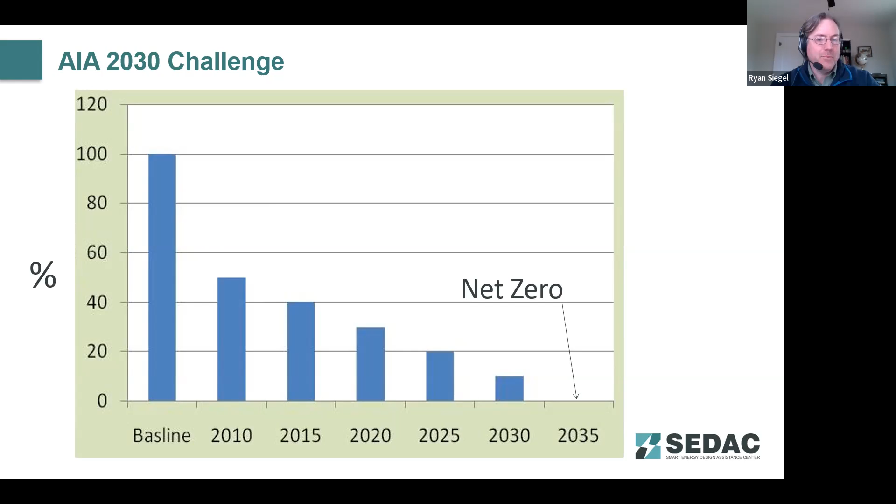But to reach those targets of the 2030 challenge, here we're showing the site EUI targets to reach those reductions - the 70% reduction and the 80% target reductions. You can see these are quite substantial targets to hit. They're quite low energy usage for a lot of facilities.

One of the things to note is like looking at convenience stores, gas station facilities, having that target energy consumption of 72.4, and then at that 80% target dropping down to 48.3. So it's quite difficult to hit for a facility that's got a lot of lighting, refrigeration equipment in that building, cold food storage. So it's a difficult target to hit, but with improvements to technology and efficiency of systems, lighting systems, we're getting much more able to hit these targets. But it is a significant lift for design and facilities to hit these lower targets.

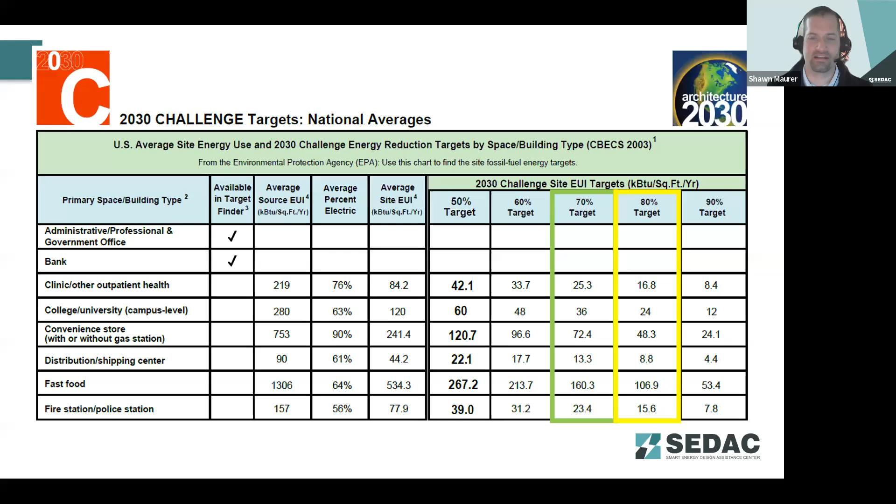So how does the zero code help? Well, the zero code and the IECC Appendix CC or RC, depending on commercial or residential buildings, for the zero code just requires that the building comply with the minimum requirements of an energy code or standard. They do have language written into them that you can use an advanced code, such as the 2021 International Green Construction Code or ASHRAE 189.1. But the baseline requirement for the zero code is that you meet the baseline energy code in effect for your area. So for us coming soon, that's going to be the 2019 ASHRAE 90.1 or the 2021 IECC.

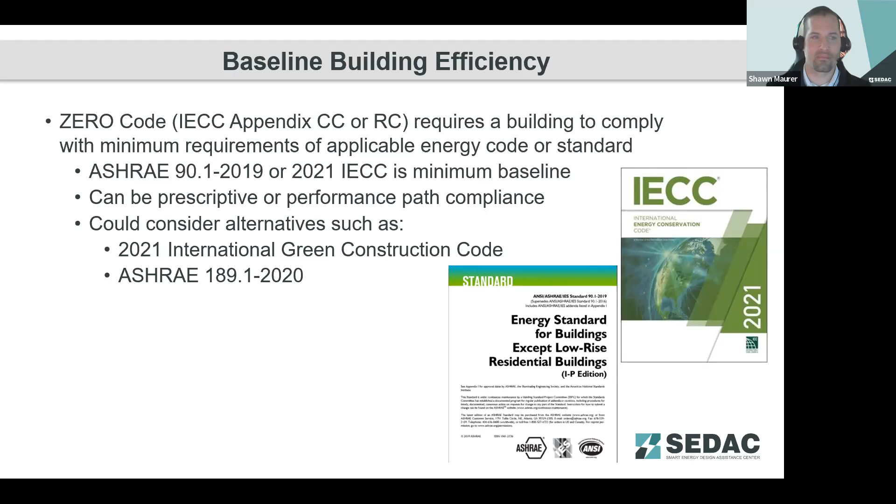They do have the ability built into that zero code to do modifications to advance energy efficiency and apply renewables to buildings. So they have language in that zero code to require site electrification and removal of on-site combustion, as that will negate the carbon offsets required for on-site combustion through purchase of renewable credits and offsets. It can also be modified to use more advanced energy standards through language built into the code that says if you're going to use a more efficient standard, insert those standards in this portion of the code.

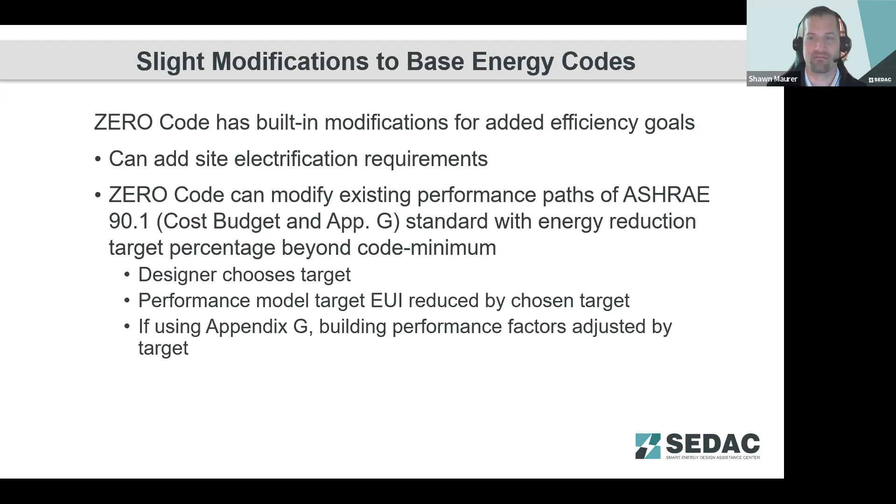If you want to enforce a lower target for your building, the code has language built in where you choose your target and calculate what the energy efficiency is going to be. If you're doing performance modeling, they'll have target EUIs reduced by that designer's chosen target. If you're using Appendix G, there are performance factors adjusted by that design target as well. So it's structured so that even though the minimum requirement is to follow the minimum building energy code, you can input advanced codes into the zero code standard.

As far as renewable energy requirements, it simply requires that on-site and off-site procured energy must exceed the minimum load used at the site. The way that's figured in the energy code, if you're following a performance path like Appendix G or one of the energy cost budget methods, you simply use your calculated budget building's energy usage and offset that with on-site and off-site procured energy. If you're following a prescriptive path, they have calculated a table of energy use intensities for different facilities.

We've put a sample here of that table for climate zones 4 and 5 in Illinois, so you get an idea of the types of targets they're looking at for those EUIs. You would get similar EUIs if you modeled the standard reference design building required for the performance path. That should get you close to what these targets are.

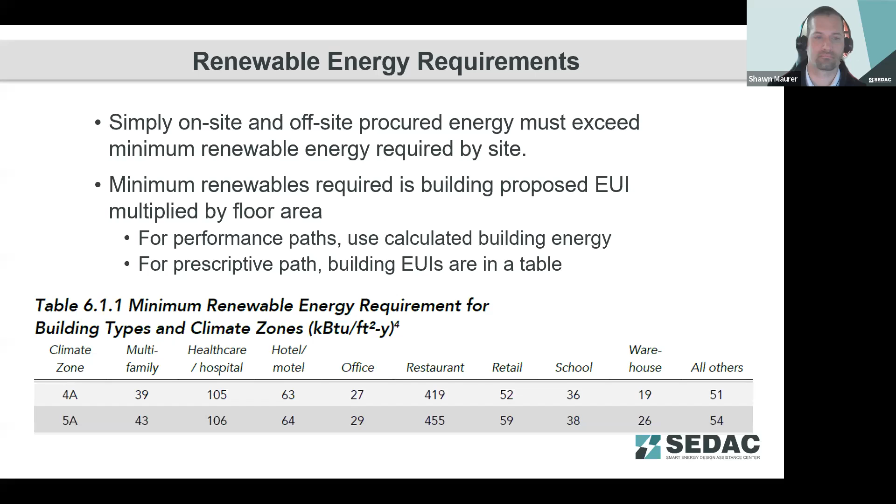So that's how it figures out what your load requirements are to determine how much renewable energy you need for your site facility. For on-site renewables, the zero code is pretty straightforward - the energy produced directly offsets energy needed at the building. For off-site renewables, there is an adjustment using a procurement factor. That procurement factor varies based on the type of procurement you're using for your offsite renewable energy. It accounts for grid losses and the potential that your procured energy results in the addition of new renewable energy deployment.

So the expansion of solar, wind, hydroelectric, and various other renewable sources. And it accounts for the potential of building owners - as buildings change ownership over time, there is the potential for them to opt out of renewable certificate agreements, and you then lose the benefits of that renewable credit for that facility.

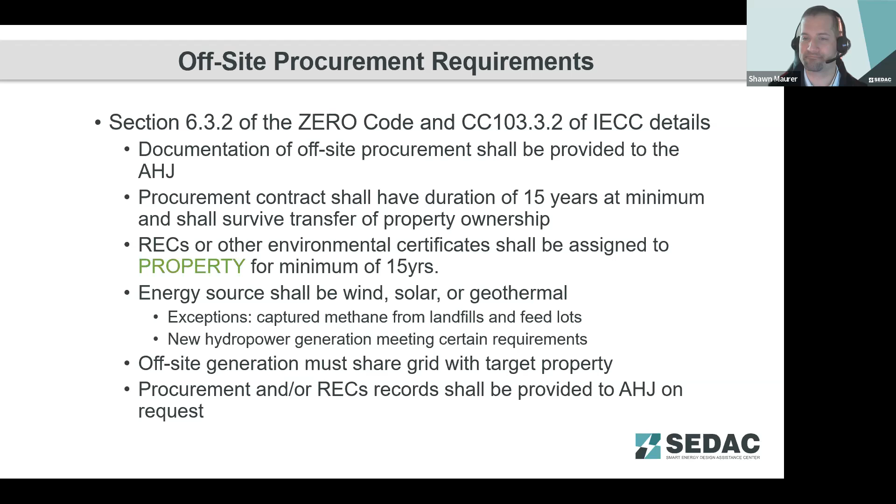So before we move on, we do have a quick poll question here. Our first question: the zero code requires buildings be how much better than the minimum energy code before applying renewables? 10%, 15%, 20%, or do they just have to meet the code minimum performance? And then: the zero code and the IECC appendix use the same procurement modifiers. Is that true or false?

Give that a couple more seconds. Seems like we got a few more responses coming in. Okay.

Looks like on our first question, everyone picked up that the zero code requires at a minimum that you just meet code minimum performance requirements. They do not require you to have advanced energy efficiency in your buildings, just to meet that code minimum requirement. And then the zero code, which is ASHRAE based, and the IECC Appendix CC, do have different offsite procurement modifiers. ASHRAE is a little less stringent than the IECC. The IECC modifiers are much more stringent. So they are different, and it will be important for following zero code in the future.

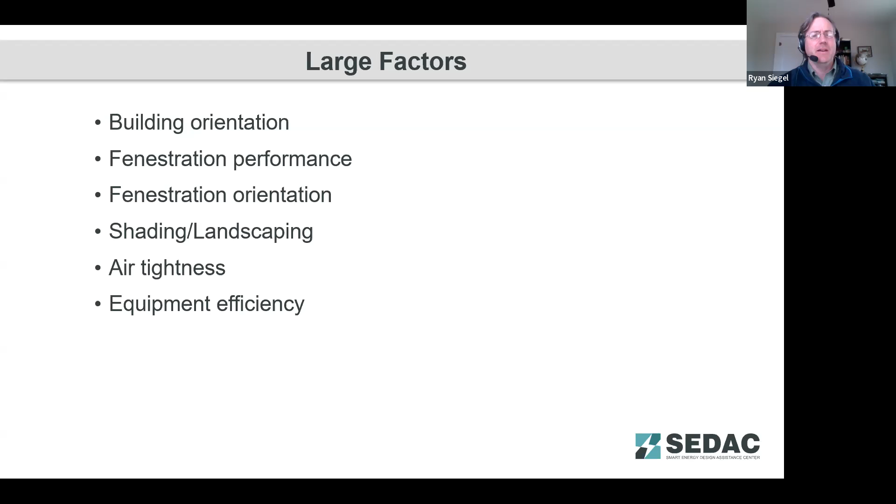Understanding that the envelope defines the boundary between inside and outside, if we don't have a good boundary there, you end up with a lot of energy leakage between the inside and outside, which makes it much more hard and difficult to reach net zero.

So looking at building orientation, best practice out there is to try to limit east-west exposures for buildings, particularly because these are the facades that get heavily loaded with sunlight and sunshine exposure, particularly in the morning and the afternoon. So in the morning, the east side is going to be heavily loaded with solar gain, and then in the evening, the west side is very loaded with solar gain.

Fortunately, this building is totally open inside, for equipment and offices, such that you don't end up with a dramatic imbalance in that gain. The gain coming in from the east for this facility is able to make it all the way through the building, so you don't end up with the east side being hot in the morning and the west side being hot in the afternoons.

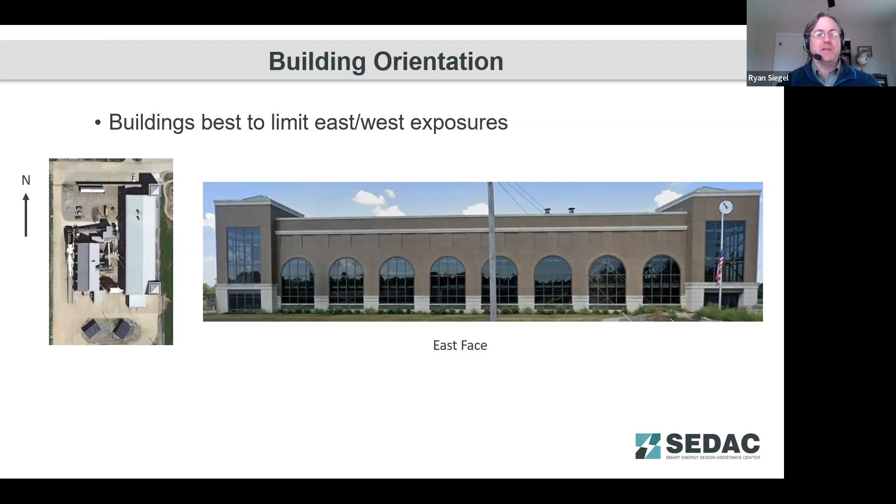Once we've tried to orient our building well and place fenestration in a good orientation, the next step is looking at actual fenestration performance, understanding that even the best windows out there really make for poor walls from an insulation perspective.

Here, understanding that the code calls for fenestration with a U factor no higher than 0.36, which is just a little under an R3 equivalency. Even the best in class that we're finding on the market is substantially better, at about a 7.7 R value. However, even a code wall minimum for opaque walls is 15.6 R value.

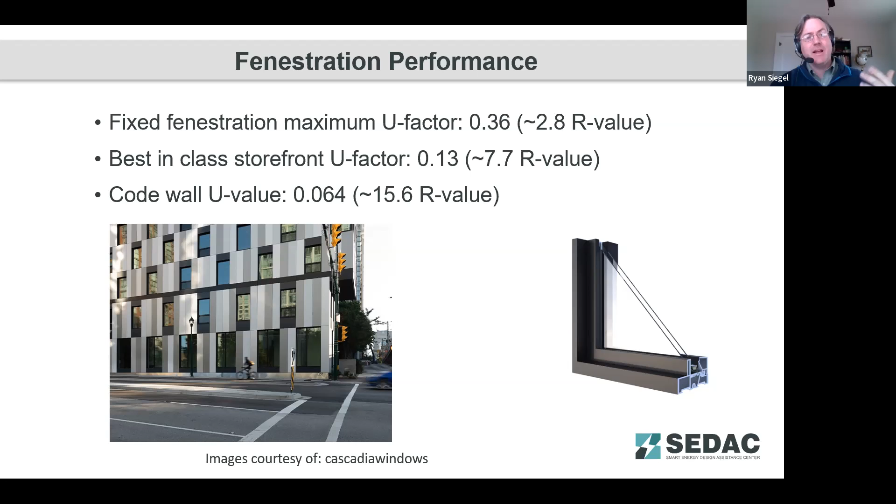So best in class is 3 times as good as the minimum standard, but it's still only half of what the wall is really needing. So from that aspect, it's trying to make sure that we're judicious about where we place fenestration, and trying to make sure that we're moving toward this best in class. Again, when you say you're losing two-thirds less heat out of the best in class windows, that's going to have a dramatic impact on energy consumption.

As part of this is fenestration orientation. As noted earlier, trying to perhaps minimize or not include a lot of east and west facing glazing, but perhaps use more of the north and south faces. North gives a nice even light during the day, but then you end up losing a lot of heat during the winter. Southern glazing, you can get much more heat load from that, but you can use that to your advantage throughout the year.

Something I should mention is one of the proposed amendments working its way through the state of Illinois is for buildings that have larger east and west facing glazing relative to the north and south facing glazing. They're actually going to require better solar control and performance of that fenestration. So if your building is heavily east and west glazed, you're going to need even better windows than what the code calls for. Solar heat gain can really be a benefit to you when you want it, but it can really be a detriment if you allow it into the building when it's not desirable. Bringing in that streaming sun in the summer is really going to put a heavy load on your mechanical systems.

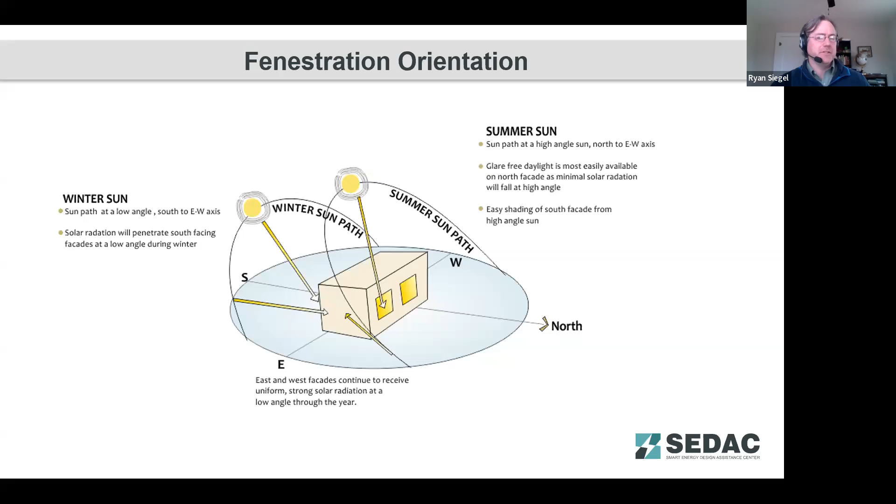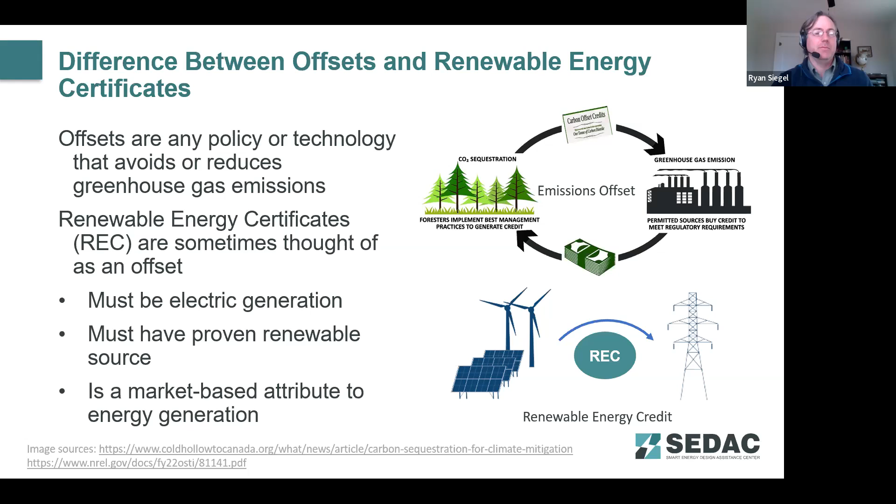As far as looking at offsets, we can do sequestration—trees or growing plants, CO2 injection. This has been carbon capture and sequestration from power plants, and there's been a lot of news around that. As far as the practicality, that has been a bit more difficult to do.

Could also have thermal renewables—biomass and biofuels gathered from a sustainable, renewable source. And then looking at transportation offsets, transitioning from gasoline to electric vehicles can produce carbon emissions reductions which some people may choose to monetize. And also, what are we building buildings out of? If I choose to change from concrete to timber frame buildings, there is a reduction in carbon emissions from that. Carbon offsets tend to be a little bit less tangible and a little bit squishier.

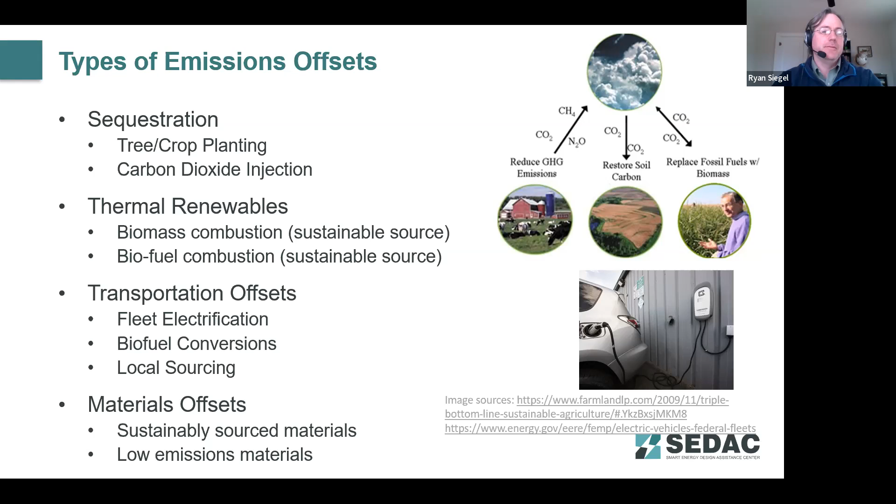Whereas if we're looking over at understanding that some of these offsets are renewable, some are not. Biofuels, you can do a reduced carbon, but once you use them, you've kind of used them.

And so some of these offsets are just, I'm going to choose to do something, like thinking about am I going to choose to not drill the oil or extract the oil from my property. That's really only a one-time thing. Once you've paid me to not extract it, I can't sell someone else to not extract the same thing that you bought.

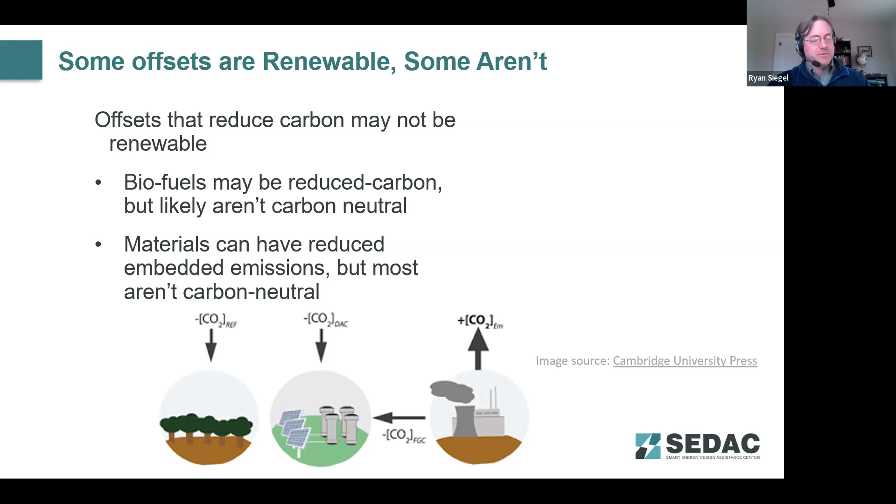So there's definitely some difference here. With that, I just want to make sure that we've covered differences between renewable energy credits and offsets. So what is the difference between a REC and an offset? Are they essentially the same? Offsets are policies or technologies that avoid greenhouse gases, and RECs are market-based for energy or electricity. Offsets are a type of REC. RECs aren't always renewable. Offsets are always renewable.

And the major takeaway from the message here, as we're getting some responses in, is that the zero code is dealing primarily with renewable energy credits. Offsets would be a separate component of net zero goals outside of the zero codes.

Looks like most people have answered here. All right, okay, good. Most people picked up that yes, offsets are policies and technologies, and RECs are market-based attributes for renewable electricity. A couple of answers there say usually RECs are considered a subset of offsets, not the other way around. So that's kind of a reverse statement there.

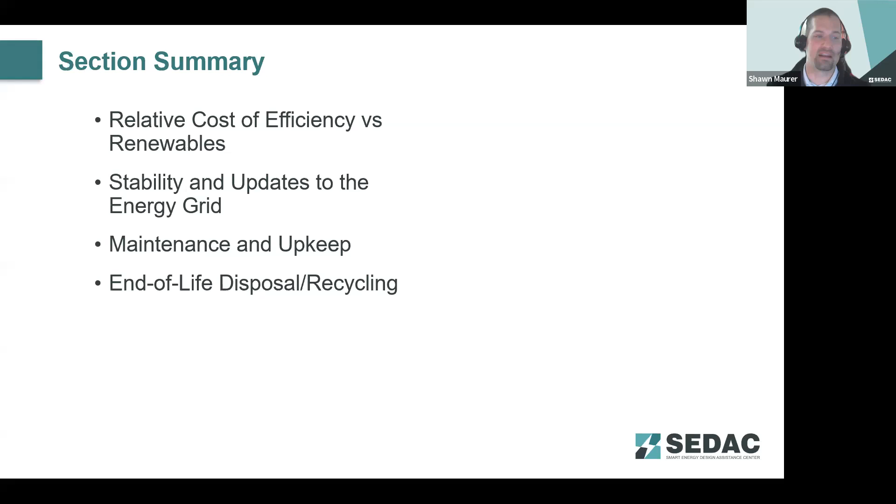Part of it is the relative cost between installing new renewables and making buildings efficient. And then we'll touch on some grid impacts, maintenance and upkeep, and end of life costs for building efficiency versus renewables. Just on a cost basis, here we're looking at the basis for utilities.

Funding energy efficiency projects in general is going to be more economical than renewables. There are some more energy intensive energy efficiency projects like whole envelope upgrades that usually have longer payback periods or higher associated costs. But in general, improving energy efficiency for buildings is going to be a lower cost option than installing utility scale or even local scale renewable energy.

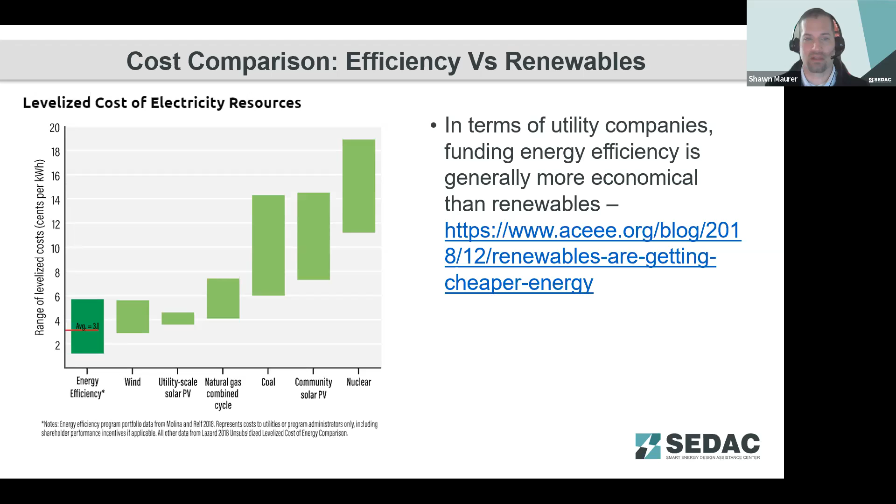So looking at kind of the relative cost for building owners, renewables are going to require additional equipment added to the building. It's going to add to maintenance costs and labor. And if you're using offsite, now you've got a reduced utility cost, but you do still have a utility cost associated with that energy consumption.

Whereas energy efficiency can be implemented as a normal part of a building's maintenance budget. So if you design efficiency into your building, it doesn't necessarily have to increase the maintenance load on the building owners to upkeep that efficiency.

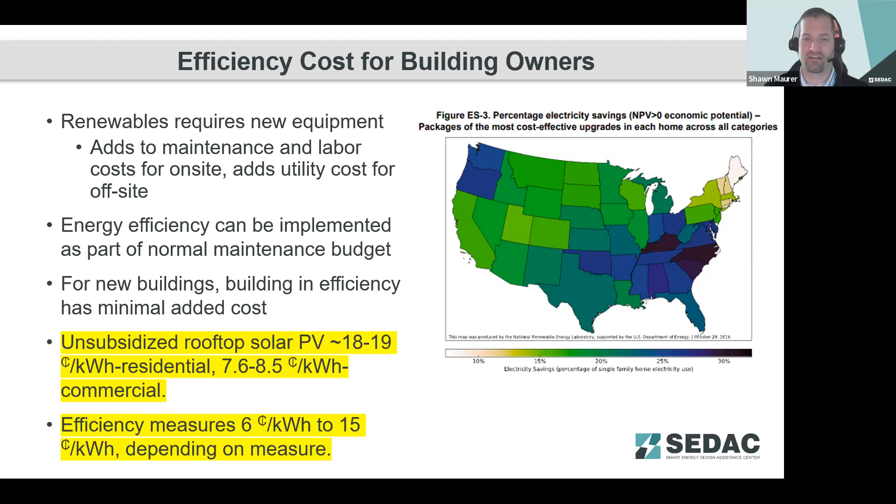But there are a lot of non-energy benefits to improving building efficiency as well. You've got indoor environmental satisfaction from the occupants, improved health overall as you're controlling the risk of mold and mildew, you're controlling the air quality better. You increase the productivity of the occupants with good designs. The longevity of the building and its systems is improved through better efficiency, and long-term and short-term maintenance costs are also reduced.

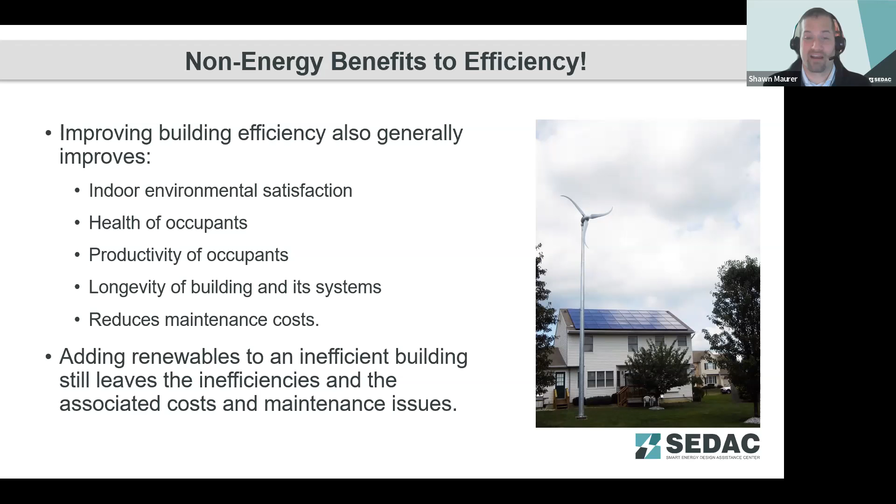Whereas if you built kind of a standard building that has some of the typical inefficiencies associated with it, and then you add renewables to it, the building still has those intrinsic inefficiencies. You still got occupant discomfort next to drafty windows and things like that, that over time are going to increase the maintenance and operating costs of that facility and kind of offset a little bit of the benefit that you get from installing those renewables.

Just looking at some of the added maintenance and upkeep for solar panels, you've got to clean them a few times a year to get the pollen and dust off if the rain hasn't fallen in a while. There is the potential for storm damage from wind and hail, although with improved panels now that's greatly reduced, it is still a possibility. But the big component is the inverters that convert the DC power to AC power so that you can grid tie these systems, and usually that's where most of your failures are going to be, on that electrical side.

So there is a maintenance and upkeep cost. The more renewables you have to install, these inverters and other components, to connect those loads together, the more you have, the more potential failures you have, the higher the maintenance upkeep you have as well.

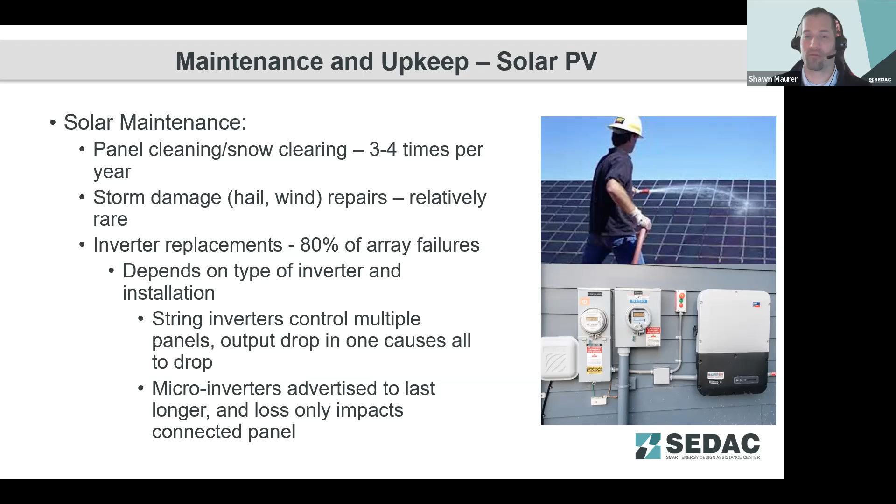And similarly for wind sites, if you have a wind turbine at your building, you've got this large device that you have to do maintenance on. A lot of times we've seen these wind turbines just run for a few years and then a mechanical problem happens, because they aren't getting the regular maintenance they'd get as part of a utility scale implementation. They have to be maintained two to three times per year. You've got to have either cranes out there to lift heavier equipment if they're doing a drivetrain replacement, or you've got to have specialized crews trained for high altitude maintenance work on these devices.

So there is an associated cost for maintenance and upkeep, and if we can reduce our loads up front and reduce how much additional renewables we have to install, we also reduce these maintenance costs.

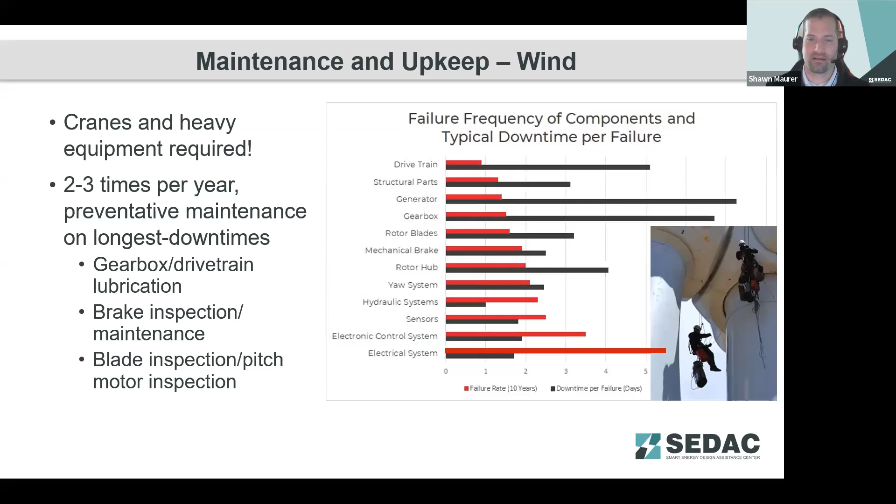For buildings themselves, better efficiency doesn't necessarily mean you're going to increase the maintenance load for the building. A lot of times, higher efficiency is going to reduce your maintenance loads. A great example is if you improve the envelope, you're reducing air leakage through that envelope. You reduce the risk of both water leaks and condensation damage, which can extend the life of the structure almost indefinitely.

For HVAC and lighting systems, if those are properly sized and installed with proper controls, there's less risk of short cycling, which reduces the efficiency and lifespan of that equipment.

The one trade-off here is that as we've made buildings more efficient, we've started installing more controls. The additional sensor maintenance load does increase slightly. You've got multiple points in the building now with airflow sensors and temperature sensors, and those things need to be calibrated or replaced over time. If you're using wireless sensing technology, you've got batteries to maintain.

So that's kind of the one trade-off with improved efficiency. If you're doing advanced controls in buildings, you may have slightly higher maintenance loads than a typical building for those control devices. But if you're doing a good design and trying to simplify that control system as much as possible, you can mitigate that, or even reduce the maintenance load for facilities.

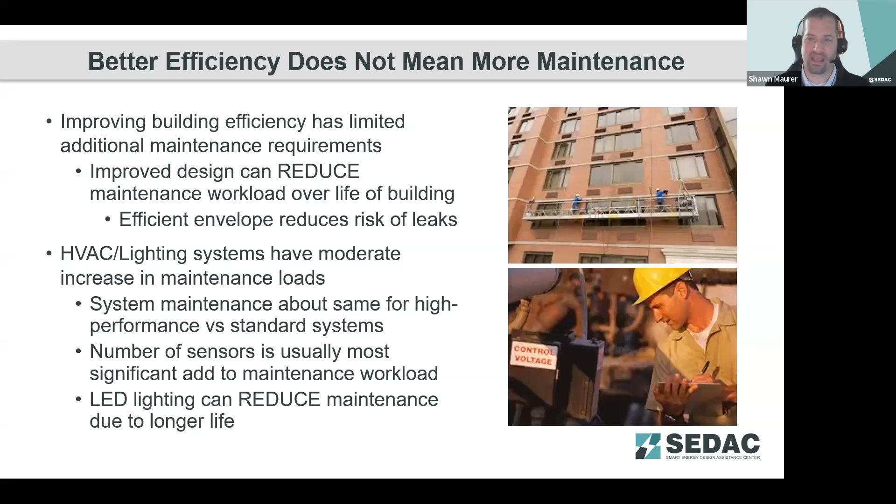So unlike renewables, which add more equipment to a building that needs to be maintained over time, built-in efficiency is not going to add that additional maintenance requirement. You're not adding more things. An efficient building and an inefficient building are generally going to have the same building components to maintain, so the workload overall shouldn't change that much.

We do acknowledge there's one exception, as buildings take more and more advantage of different efficiency strategies, and that is dynamic envelopes. You've got more moving surfaces, little actuators for shading devices, and that's going to dramatically increase the maintenance load for an envelope. You've got a lot more failure points, things that can go wrong there.

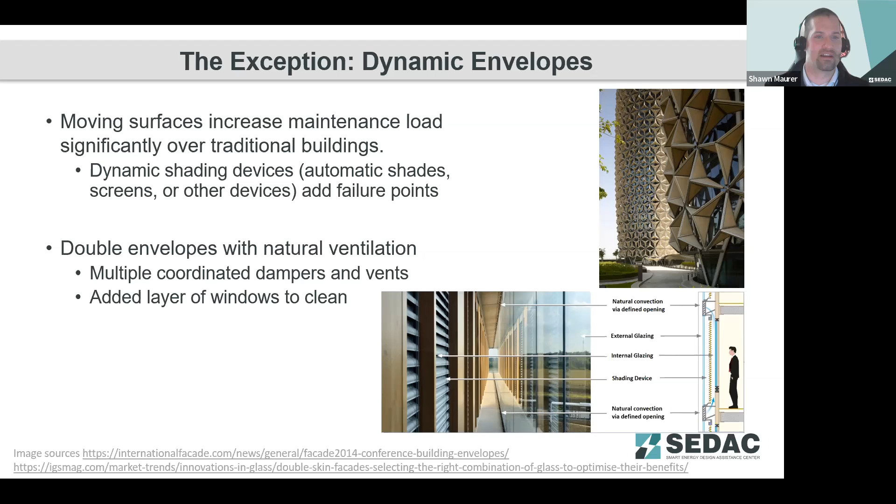With double skin envelopes, it depends how they're deployed. If you've got some automation involved to take advantage of natural ventilation, then you've got dampers and vents with control devices on them that's going to increase the workload a little bit. Otherwise, the main difference is you've got an additional layer of glazing to clean. So depending on how these are deployed, it can be either a minor addition to your maintenance workload or a more significant one.

Usually the core components of the building, the structural components, can last for a decade or more—a century or more, many decades though, at least twice the life expectancy of most renewables.

There are components like roof surface structures, membranes, things like that, that have a 20 to 30-year life. But it's a relatively low cost to replace just that one component over the entire roof.

Similarly for fenestration, typically after 20, 30 years, you start having seal failures, things like that, that's going to degrade the performance of those windows. And it might start to be cost effective to look at replacing those fenestration systems after that time frame. But again, approximately equal life, and if you've got good, well-installed windows, even slightly longer life than most renewable technologies.

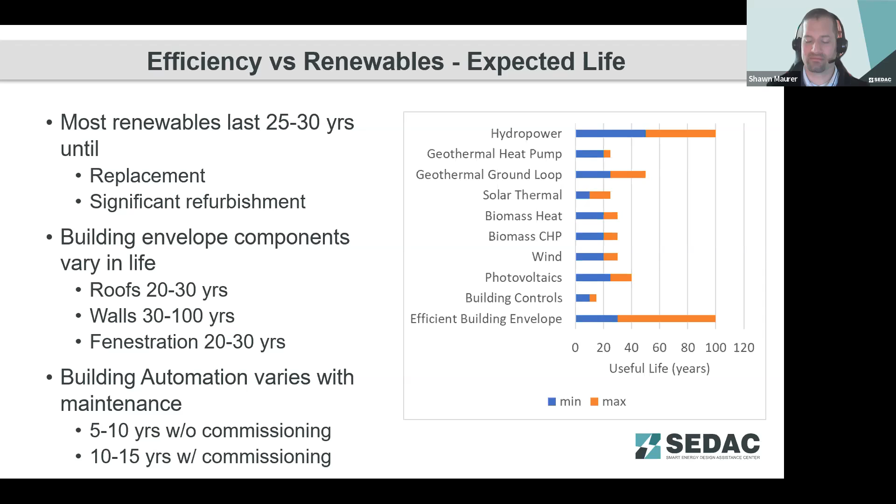But we do want to note it's going to take a combination of strategies to reach a net zero future. Solar energy is generating that mid-afternoon peak energy. With some storage, you can offset that to match some of the building loads a little bit. Efficiency is going to drop your building loads overall, so that renewables—one, you can reduce the capacity that needs to be installed, and two, you open up a little bit more load flexibility as well.

With building controls, you can shift building loads around a little bit to better match renewable production and align generation capacity with demand. So a combination of all these needs to be done, but again, efficiency is doing that overall reduction of total energy that's going to last significantly longer as well.

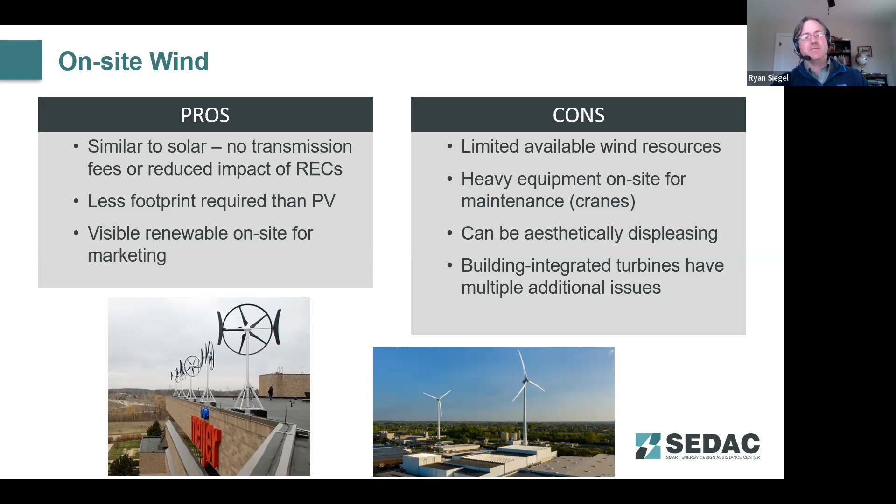On-site wind, again, we don't have transmission fees and anything like that. These can have a smaller footprint than PVs, and again, highly visible. The issue you run into is available wind resources are fairly low for this. And these can require some heavy equipment to do maintenance—a lot of cranes, as you know, if you need to lift parts of these off, can be rather heavy. So again, aesthetics is a judgment call depending on different people's viewpoint, and trying to integrate the turbines into buildings can have a lot of challenges there.

So typically we see renewables procured offsite. The nice thing is, if you procure offsite renewables, typically there's a third party dealing with any of the maintenance, as you're normally buying those through a power purchase agreement or other utility contract. Again, you don't have quite as much impact on the direct facility, but the downside is, since it's offsite, you've got to pay to get that power in, and you cannot be grid independent.

That's not even an option, and you don't have the visibility of making that statement, of being able to show people that renewables are important to you. It's not quite the same when people ask and you say, hey, I got renewable energy, and they ask you where it is, and you say, well, you go about 300 miles west and hang a right and you'll see it.

Utility grade, utility scale renewables do have wilderness and wildlife impacts. Fortunately for solar, we've seen this transitioning away from the gravel pad that everything sits on, toward more of a planted bed, with a lot more pollinator and nature-friendly, native-friendly species. So we have seen that transition here.

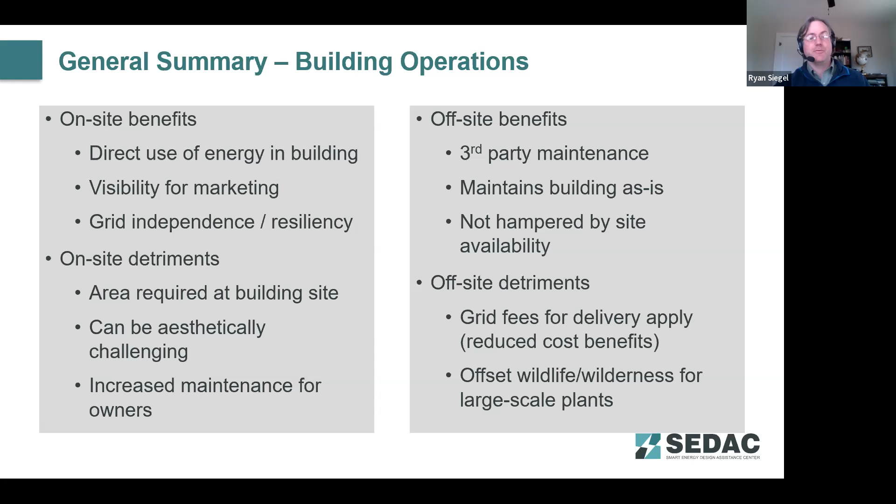Some of your procurement options, if you're doing on-site procurement—most of the time we see this done through net metering. You can do some export, though generally the terms aren't very favorable if you do end up having to export electricity. With that, because it's directly metered, you have it directly offset immediately, so you're not having to trade back and forth and do a lot of mental accounting, if you will. And the nice thing about on-site is they're generally a permanent part of the building and site.

Whereas if we look at more off-site, you can just purchase electricity from off-site, which is perfectly fine. And the issue can be trying to actually get a hold of the RECs. This can also be an issue when you're dealing with on-site renewables.

I mentioned I'd bring up the state of Illinois incentive programs for renewable energy. How those generally function is they're buying the renewable energy credits. So if you're taking advantage of the Adjustable Block Program or Illinois Shines program, you can no longer claim your renewable energy because you've sold off that renewable energy credit back to the state of Illinois. Those credits are then bought by the utility companies to meet their renewable energy requirements. But just so you're aware, if you take advantage of the Illinois incentive programs, you no longer can claim your RECs.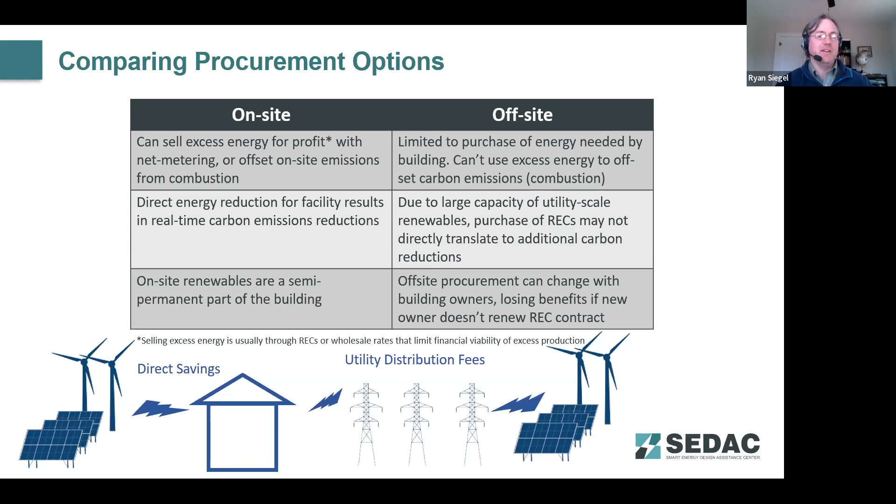When we look at the accounting for procurement, when it's on-site it's very straightforward. It's net metered, or with a PPA you're purchasing it directly, so there's not really an issue there. The only question is are you retaining and retiring the RECs yourself? Because often with a PPA, you can buy the electricity and not the RECs, or you can buy the electricity with the RECs. Again, with zero codes they make it very straightforward - it's one-to-one, so you don't have that issue.

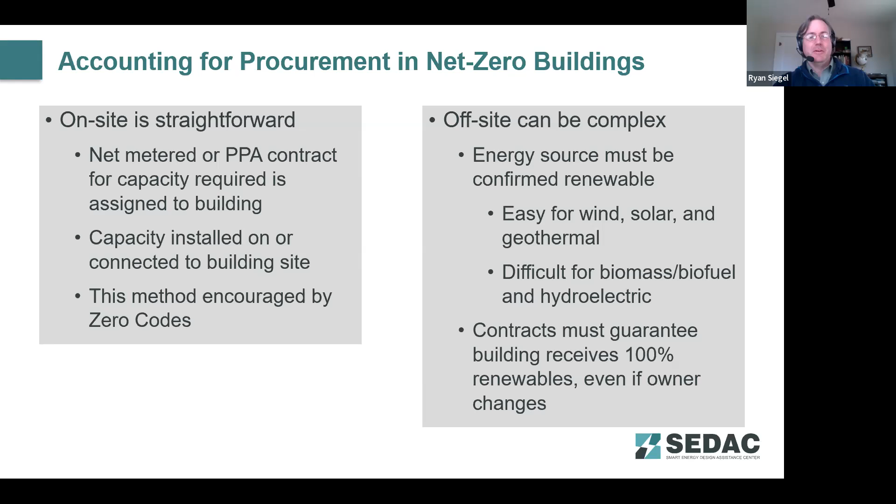Okay, well, do I have to derate my credits by any amount? If you're doing offsite, not only do you have to verify that, but also be able to trace and track it, and as we've touched on a few times, the procurement factor can really dramatically shift that math on you. So being able to understand what type of renewable energy you're getting, and how much you have to derate that to see if you've met net zero or not. On-site is really easy and straightforward; if you're doing off-site, it can get a little more mathematical.

So with that, I believe we've got one final poll here.

One question I would have for folks, and you can just pop this in the chat, is any net zero buildings that our audience has been a participant of. It would be interesting to collect a little bit of a listing of some of those you guys have been a part of, and perhaps be able to recognize some of those accomplishments and achievements.